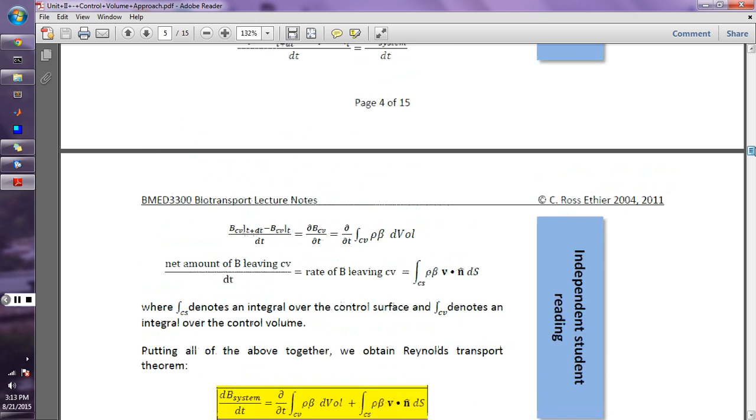Big concept here, and you kind of need to know this because I can guarantee you're going to be using this basically every problem set, every exam for the whole term. So if you don't understand this idea of Q and M dot, you're going to have a really hard time. So what do we got?

Q, this guy here, we call that the volume flow rate, or sometimes just the flow rate. It tells you how quickly volume of fluid crosses a surface. Notice the word quickly in there, right? That implies something to do with time. And so it has units of meters cubed per second. If my flow rate is 2 cubic meters per second, well it's just what it says, right? I get 2 cubic meters of that fluid across the area per second.

Right? So remember, whenever you see Q, what's the little bell that goes off in your head? Do you remember the bell that should be ringing in your head when you see Q? You need to ask yourself the question, what is the surface that the Q is crossing? Remember that bell, please. All right, what is the surface that the Q is crossing?

So once I know what that surface is, then I know what n hat is. N hat is the normal to that surface. And remember, I do v dot n hat. Why do I do that? Because that gives me the part of the velocity that's actually crossing the surface. Remember, we broke v into two parts: there's a part parallel to and a part normal to the surface. V dot n hat gives me the part that's normal to the surface, and that's the only part that counts for carrying stuff across, right?

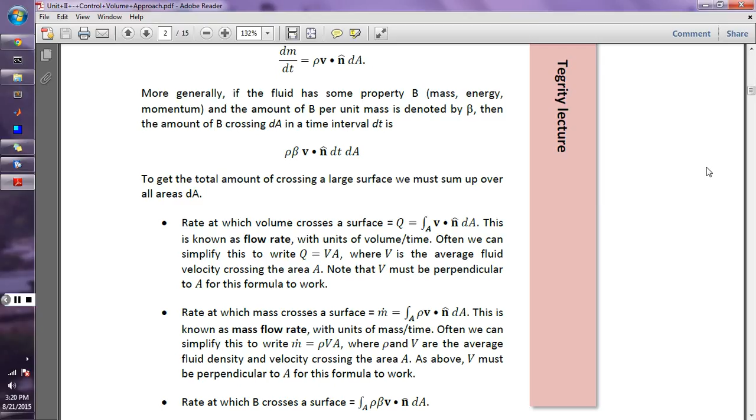So Q is the volume crossing per time. M dot is the mass crossing per time. Q has units of cubic meters per second. M dot is kilograms per second, or some variation on that. And it's almost the same.

The only difference is I have an extra rho. Notice that - other than that, these two are exactly the same. So all the same ideas, just got an extra rho in there. That's it, nothing too terrible.

But then I have the idea, hey, I'd like to have a simpler version of that messy thing too. And so maybe if V was constant over the surface and rho was constant over the surface, I could slide them through that integral. So if I did that, then the rho V dot n, just like before...

Whoa. Where are we? Okay, we skipped ahead. We're finished with that section. Any questions?

Your rho V dot n, you could slide that through the integral, right? And you would end up with this simple formula here that says m dot is just rho times V times A. Well, that's not terrible. Right? Same caveat as before.

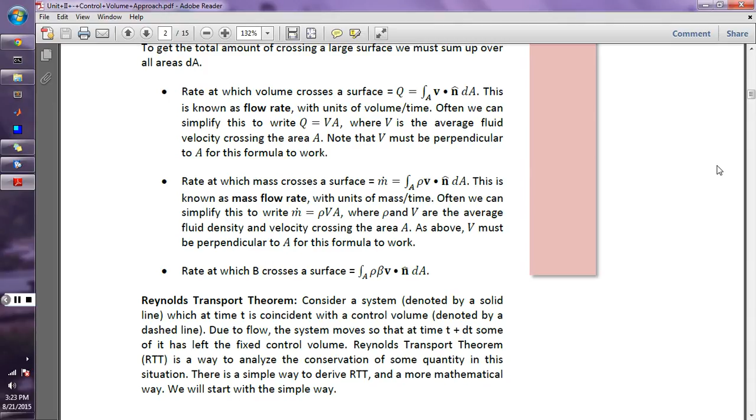Okay, so now the idea is that we are going to try to apply the laws of physics, which are written in a Lagrangian sense. That's the particle following sense. But we're going to apply them to control volumes. What's a control volume again? Anybody remember that? Dashed line, fixed region in space, right?

As opposed to a system, which is an identifiable collection of matter, right? And we did that little example with the tank last time, and you know, the water drained out, etc. Okay. So you all should have seen this in 2210, right? Yeah, does that look familiar? Everybody's saying yes. Awesome, good.

So here's our basic idea here: accumulation is inflow minus outflow plus creation, except that in 3300, we're going to do it as a rate equation. Did you do it as a rate equation in 2210? Yes, definitely. Okay, good, there you go. So our rate of accumulation is rate of inflow minus rate of outflow plus rate of creation. Easy peasy, there we go.

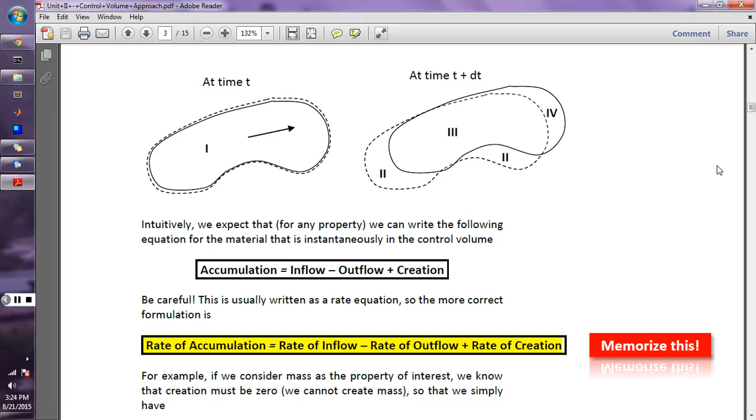Now that's all nice and everything, but we have to now be able to put math to those words. And the first thing I'm going to ask you to think about is this term, or actually combination of terms here, rate of inflow minus rate of outflow. So that's basically how quickly stuff is crossing the control surface.

Hey, okay, so sorry, I didn't say this, let me back up for a second. The idea here is that we're going to apply this to a control volume, right? So it's going to be the rate of accumulation in the control volume. It's going to be the rate of outflow across the control surface, which bounds the control volume, et cetera, okay?

So this term here, we basically need to be able to figure out how quickly something is going across a surface. Hey, we know that, right? We just figured that out. That was the whole thing that we just talked about. So if it's volume that I care about, that's Q, that's how quickly it's going across the surface. If it's mass, it's m dot. If it's B, it's that funny formula for B. So we actually know the math for that.

Now there's just one little thing I got to tell you about here, which is sometimes confusing to students. Let's say that this is my control surface. We are going to agree that n hat, the normal to that surface, always points out. I got two choices, right? There's two normal vectors, could point out or could point in.

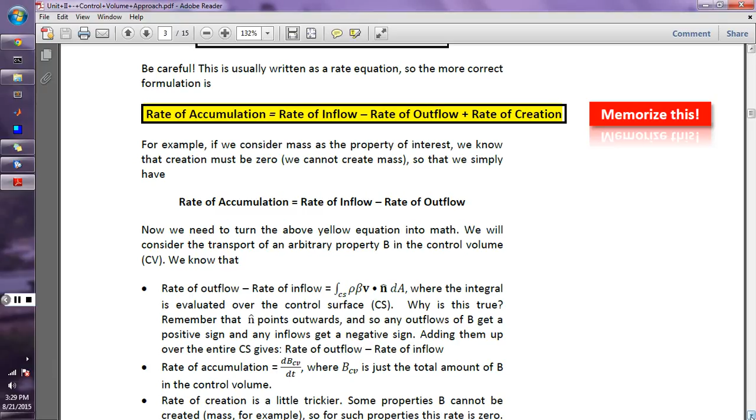Let's suppose that B was mass. What is the rate at which mass is created? You can't create mass, right? So we would know if we were going to do this for mass that that term would be 0.

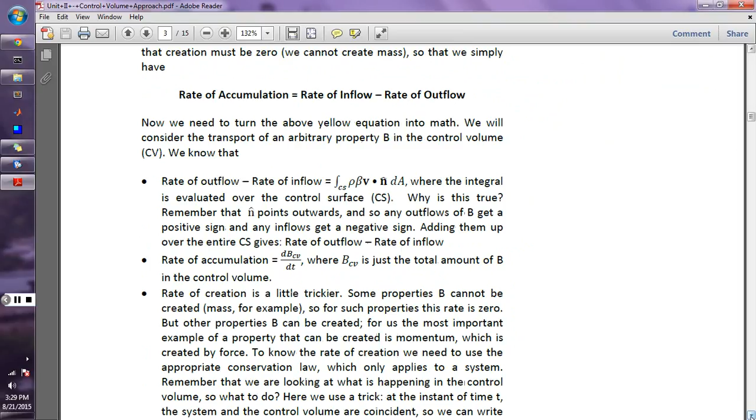What about if B was momentum? Can you create momentum? How do you do that? Force, right? This pen right now has 0 momentum. Now it has momentum, I created momentum. How did I do that? I pushed on the pen.

So depending on what B is, that right-hand term, that double circle term, is going to be different things. And I can't tell you what it is until you tell me what B is. So for right now, we're just going to leave it general, and we're going to say it's the rate at which B is changing for the system, because the whole idea of conserving mass or balancing momentum is a system idea. It's a Lagrangian idea.

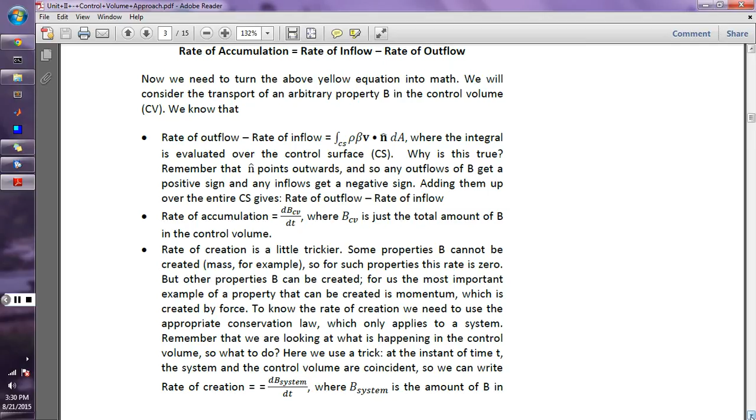So in math, what I end up with out of that whole thing is this equation right there. The rate at which some quantity B changes in the system as a function of time - this is where the physics comes from. That's equal to the rate at which B changes in the control volume, plus the net rate at which B is carried across the control surface.

That's called Reynolds transport theorem. It's real powerful, we're going to use it a lot. It's your friend. Questions?

Is that formula just the accumulation formula rearranged with substitutions? Correct, exactly. Can you go through and say which part is which? Sure.

This is the rate of creation term, that first term. This is the rate of accumulation in the control volume. And this last term here is the rate - so I should say this is the rate of accumulation of B in the control volume, this is the rate of creation of B, and this last term is the rate at which B is carried out of the control volume. And it's actually your net rate, so it's your out minus in.

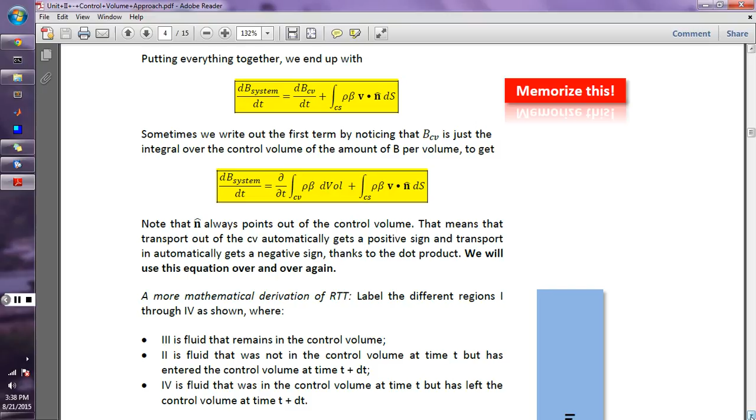Other questions? All righty, so pretty abstract right now, right? You're probably thinking, where is he going with this? Oh, by the way, if you like math, read this blue part here. Okay, let's start to get a little more crisp here.

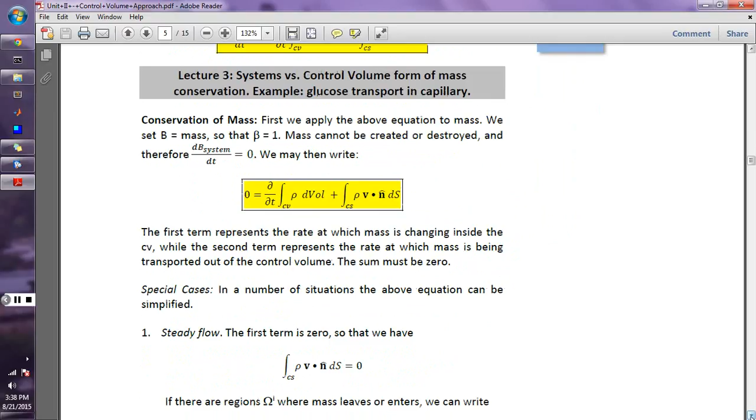The first thing that we are going to conserve is mass. It's always a good idea to conserve mass, right? As I say to students, if you're not sure what else to do in BMed 3300, conserve mass. You'll never be wrong. It might not be useful, but you won't be wrong, all right?

So let's do that. I'm going to let B be mass. Am I allowed to do that? Sure, why not? Beta is the B per mass. So what's mass over mass? 1. So beta is just 1, right?

What's dB system dt? How much mass can I create for a system? 0, right? So that left-hand side is 0, that's my creation term. This term here represents the rate at which mass is changing in the control volume.

And the second term is the net rate at which mass leaves the control volume. Sorry, I'm running out of space here. That says net rate at which mass leaves the control volume. But remember, n hat points out, so if it's going out, it gets a plus sign, right? And they have to add to 0.

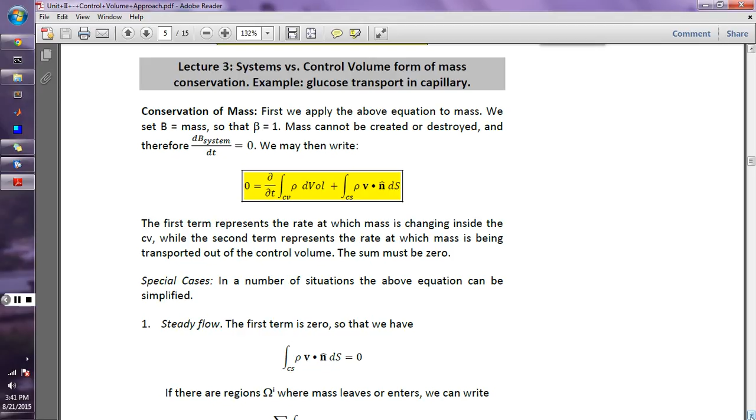If nothing's changing with respect to time, and you take d by dt, which asks how quickly is this changing with respect to time, well if it's not changing, the answer is 0. So you get to cross out that first term. It's one of the awesome feelings about biotransport, when you can cross out terms.

One of the decisions you have to make early on when you use this equation is whether it's a steady or an unsteady problem. It's obviously a lot harder if you have to keep that term in there, with integrals and derivatives. So decide if it's steady or unsteady. If it's steady, that term is crossed out, and your life just got a lot easier.

Unfortunately, if it's unsteady and you think that it's steady, that doesn't end well, because there's no way you can ever get the right answer. So be careful about that decision.

But let's suppose that it is steady. Then I just have rho v dot n ds equals 0, which says that the net outflow of mass across the surface is 0.

Does that mean no mass can ever cross the surface? Why not? Because it could come out in the same amount as it went in. It's the net, right? So I could put 1 kilogram a second in and 1 kilogram a second out. I balance. I'm good.

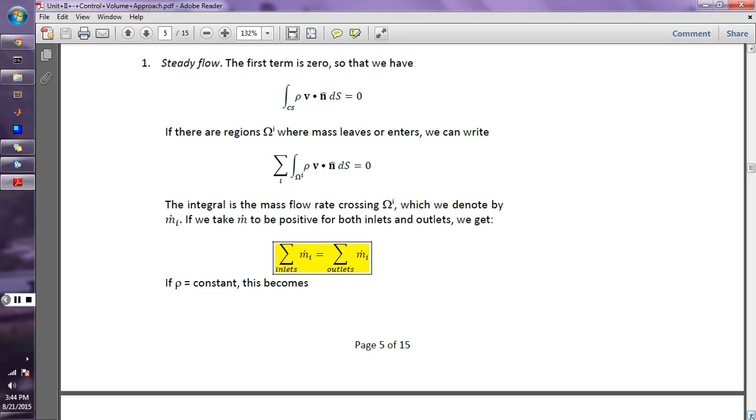Now I'm going to throw a curveball at you. I'm really sorry, it's actually not my idea. It was probably some chemical engineer, I'm guessing - they're dangerous, they shouldn't be allowed to be engineers, but we let them because we feel sorry for them. Some chemical engineer didn't know how to do negative signs, and so what they did was say: I'm only ever going to have m dots that are positive, even if it's going in, even though it should be negative when going in. I'm going to call it positive whether it's going in or going out. Yeah, I know, stupid, right?

So what happens in that case is this formula gets written as m dot in equals m dot out. You add up over all the inlets - let's say you have 3 inlets, you get your m dots for those, add them up. You have 4 outlets, get your m dots for those, add them up. Treat them all as positive. They have to equal each other.

Conservation of mass. Remember that m dot equals rho Q. So those m dots look like rho Q's. And if rho was constant everywhere, I could cancel the rhos, and what would I get? I would get Q in equals Q out, which is what we've got here.

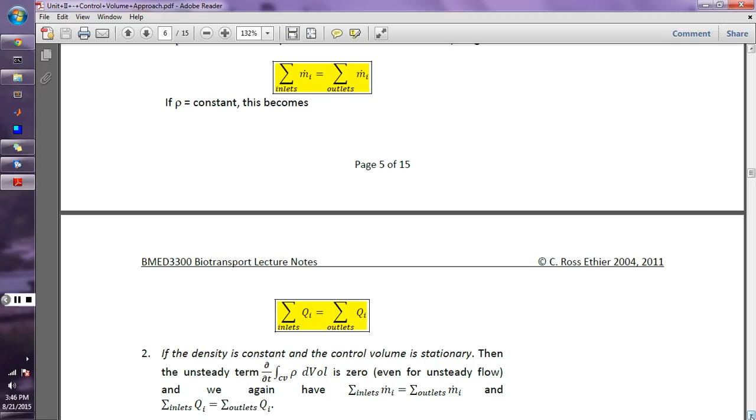Blood flows in a capillary, radius of the capillary given as 10 microns. Is that a good radius for a capillary? How big is an average capillary? How big is a red cell? Are you a biomedical engineer? Oh, really?

Anybody know how big a red cell is? Yes, it's about 8 microns in diameter, kind of a saucer-shaped thing. It's about 2.5 microns thick, but it's got a weird shape, so it's hard to assign an exact thickness, more like 2 to 3 microns.

Red cells, depending on which organ they're in, can just slide through the capillaries, or in some organs it's a very tight fit. The smallest capillaries are about 6 microns, larger ones 10 to 15 microns or so. So 10 microns is a good number for a capillary.

Which organ has the smallest capillaries? Dr. Harley, did you discuss this with these students in physiology? Isn't it handy that we have Dr. Harley sitting here? Did you have this group of students? No. Oh, I see. But were they supposed to have known this material? Yes, they were. Okay, just checking. Anybody know? Brain? No.

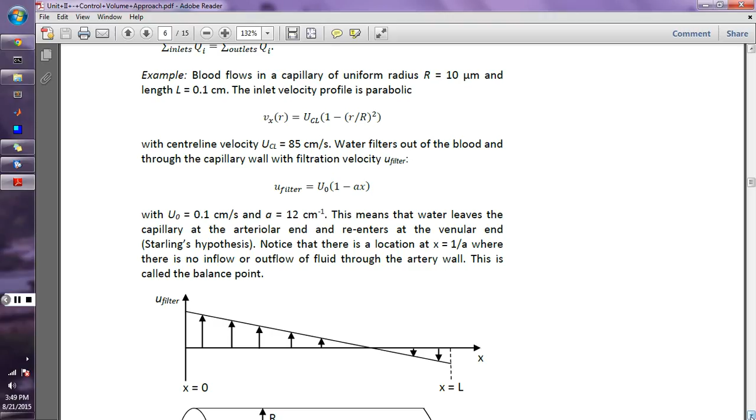All right, we've got a 10 micron capillary, 0.1 centimeters long, and the inlet velocity profile is parabolic. So when I look at this, this is the inlet right here. To analyze this problem, I'm going to use cylindrical coordinates: x points down the capillary, r is the radial position away from the center line. That makes a lot of sense since it's a cylindrical capillary. Good luck doing this with Cartesian coordinates — you're going to have a lot of fun. See you in a month.

Notice I've got v sub x there — that's the component of velocity in the x direction. It's telling us that v sub x follows this formula, which looks complicated but isn't so bad: it's UCL times something in brackets, and UCL is a constant equal to 85 centimeters per second. So the x component of velocity has a 1 minus (little r over big R) squared dependence.

Should we be nervous? I don't know if that's rain or AC. I can't tell, I think it's AC though. Maybe it's the zombie apocalypse. Hopefully we can get this problem done before that. I'm not sure about that — this is a pretty long problem.

Better work fast, eh? So if you draw that out, you see that the velocity profile actually looks like this. It's max when little r equals 0 — 1 minus little r squared is max when little r is 0. What is that equal to when little r equals big R, the radius of the capillary? It's 0. So this is a velocity profile which is 0 at the walls and max in the center, a parabola in between. That's actually how blood flows, plus or minus.

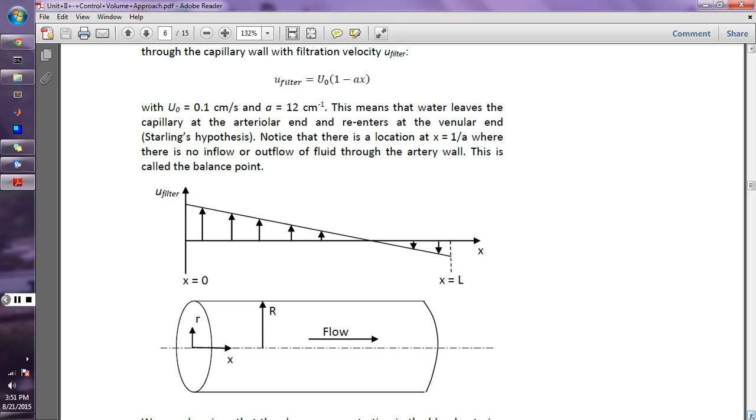Now, I'm telling you right now that at some point during this problem, you are going to have to calculate an m dot across that inlet. What is the bell that is ringing in your head right now?

What's the area? So the area is going to be the inlet. And the second bell? Oh yeah, that's a whole nother bell. No, this is specific to this inlet, right?

I'd like to use the simple formula for m dot. Am I allowed at the inlet? Everybody agree? So what is that simple formula? M dot is rho times V times A, right? Or rho Q. Sir, do you agree with that? No? Are you calling him a liar?

I just initially thought, since we described it, it's a parabola, so it's not constant. This gentleman says that since it's a parabola, it's not constant over the surface. What do you think about that? Is he right?

I agree with this guy here. Yeah. Is he your friend? Are you just saying that to make him feel good? He actually is a friend, but I also agree. Oh okay, it's a 2-for-1 deal, right? What do you think, are you his friend? I don't know. Okay, I'll take that as a no. What do you think, is he correct? Kind of makes sense, yeah.

Be careful, V is not constant over that surface, right? Can I use that simple formula to get m dot or q there? Nope, not allowed. Don't make that mistake. Please, please, please. Okay, easy trap to fall into.

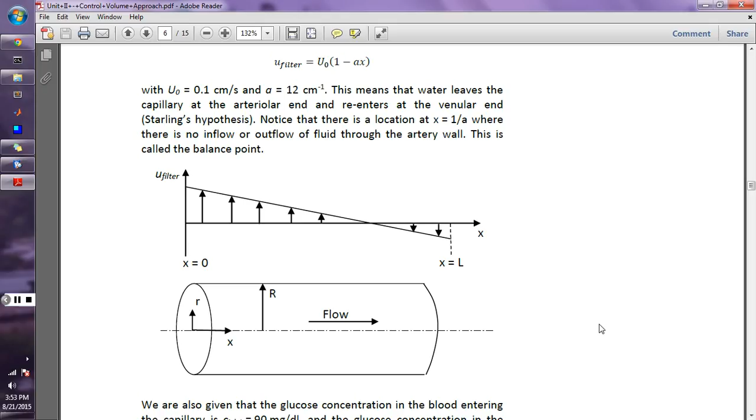Okay, so I got some blood coming in here, and then water filters out of the blood and through the capillary wall with filtration velocity given by that formula there. Oh my gosh, that sounds dangerous. This person's got water leaking out of their capillary. Should probably see somebody about that, right? Do you have any water leaking out of your capillaries? I hope not. What about your extremities, though? In your extremities? Yeah, that explains a lot.

Sir, do you have any water leaking out of your capillaries? Yes, sir. Why is that? Because they're perforated. Yeah, permeable. That's right. Anybody ever heard of Starling's Hypothesis?

Dr. Harley, did you cover Starling's Hypothesis? Oh, you guys didn't do Starling's Hypothesis. Okay, so let me tell you the backstory here. There's this guy called Starling, and he said, I think water should leak out of capillaries, that would be a really good idea. And so he said it as a hypothesis, and eventually it was proved true.

And why is that a good idea? Well, if I'm a cell living somewhere around here, and I need some oxygen and glucose or whatever, then I got two ways to get it to me. I could just have it diffused to me all the way through the capillary, across the capillary wall, and all the way down to where I'm living, right? The thing about diffusion is it's real slow. A faster way would be if some water leaked out of the capillary, did a little detour, visited the cell, dropped off some oxygen and glucose, picked up some CO2, some urea, stuff like that, and then headed back into the capillary. And that's exactly what happens, right?

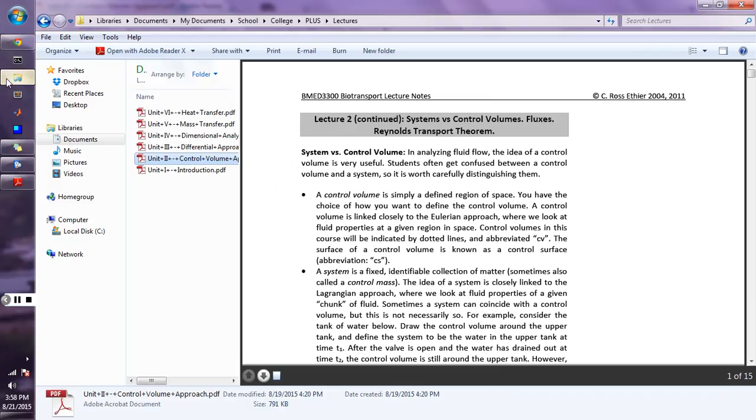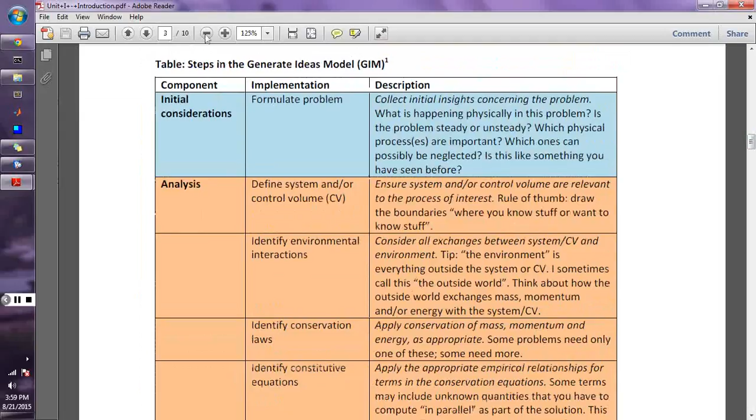Initial considerations: we collect initial insights concerning the problem. What is happening physically in the problem? We already talked a little bit about that. Water's going across the wall, coming in, there's a parabolic velocity profile, and there's less glucose coming in. That's the first step of GIM, and you should understand what's happening physically there, okay?

Is the problem steady or unsteady? Which physical processes are important? Which can be neglected? That's the blue part. Then we have to define the system or control volume. Then we define the environmental interactions, what happens between outside the control volume and inside it. And then we identify the conservation laws and apply conservation.

So sir, you wanted to start here, why did you want to start there? Because I forgot about GIM. You forgot about GIM, don't forget about GIM, okay? Are you going to forget about GIM? No, definitely not.

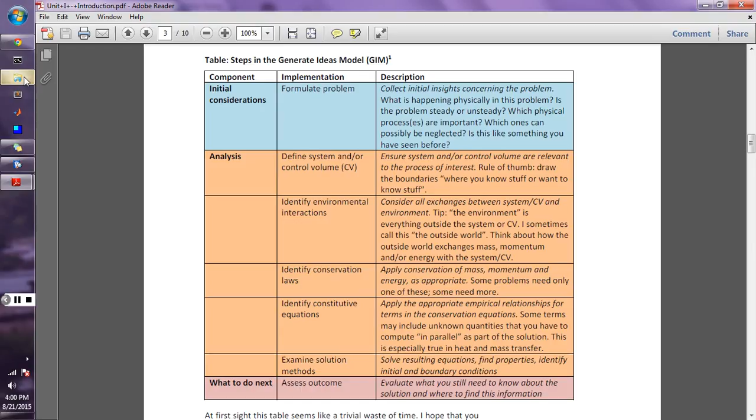Is this steady or unsteady? Steady? No, steady? Unsteady. It's unsteady, it's obvious, right? Why is it unsteady? Because things are changing.

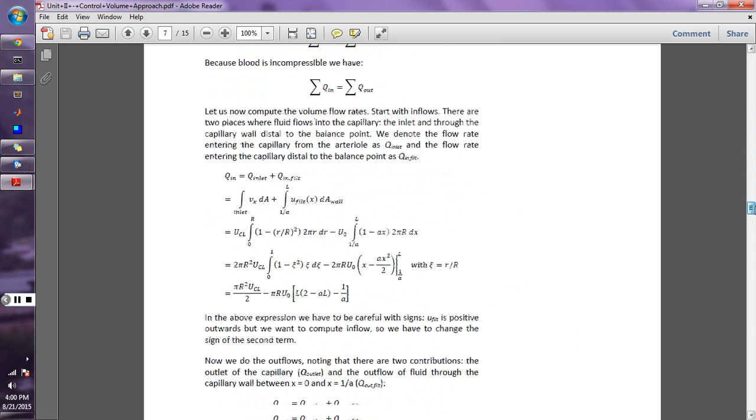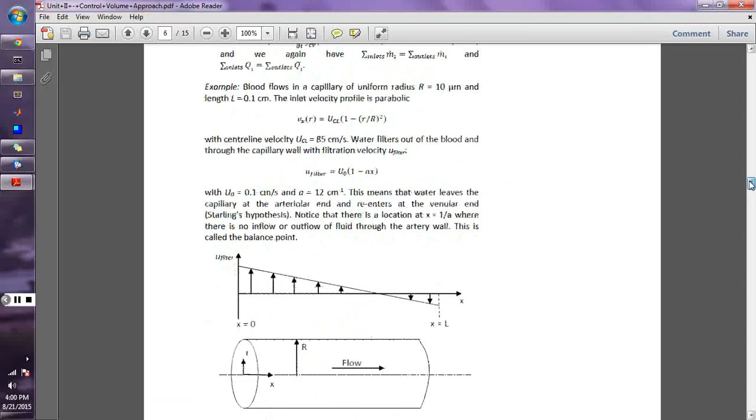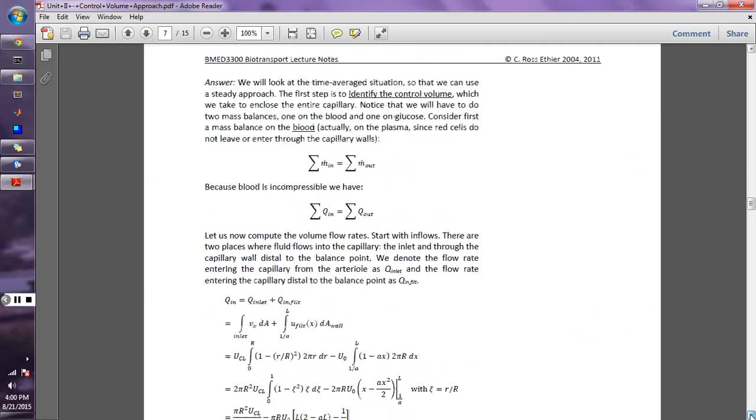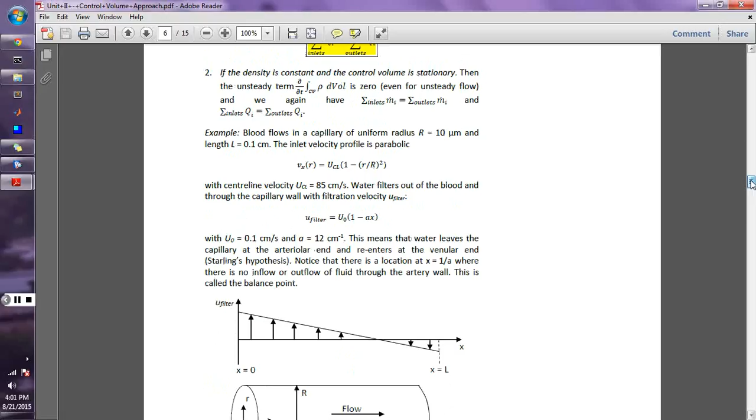Do you have any money with you? No, I have a credit card. Do you have a phone? Is it a good one? It's a Samsung, not that great. Do you have a laptop? Yeah, it's in my bag. Is it a good one? Yeah, it's alright, like $200. That's a cheap laptop. I was hoping we could bet. Do you want to bet? Will you take an IOU? How much would you like to bet? You say no, I'm not. You're not going to take an IOU? Well I got cash right here, but I'll take an IOU from you because if you don't pay up, you fail, okay? Do you want to bet? Can we make it my first test or something?

No, we'll bet $20. Steady or unsteady? Unsteady. Everybody see this? He's betting $20 on unsteady. You sure you want to do this? Yes sir. I've never had a student go this far before. Jim, what do you think? He's crazy. He is crazy.

Is this steady or unsteady? You said things are changing, so tell me how it's changing. What's changing with time? Let me get it back up on the screen here.

Steady or unsteady? I think it's unsteady. You want to bet too? I can make a lot of money here, man. How many of you? There's 80 of you, $20 each, that's $1,600. Maybe a couple of you will guess right. Let's call it $1,500. Want to bet?